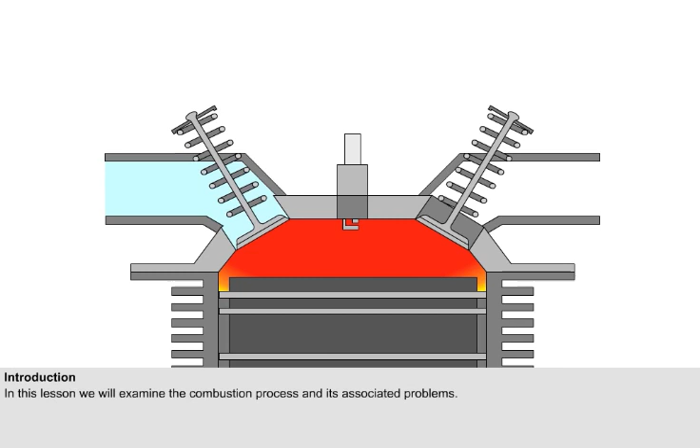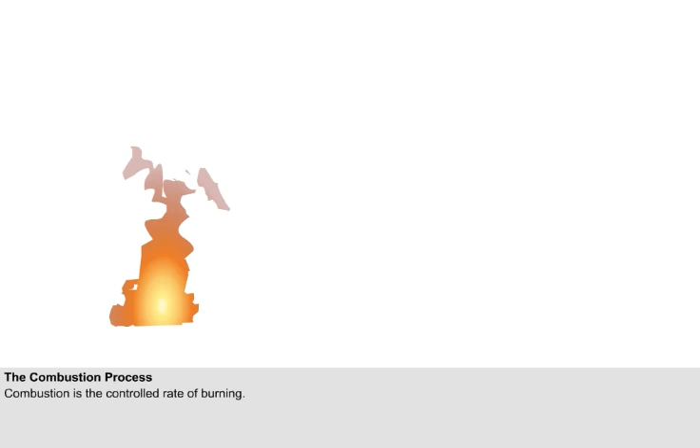Combustion of the air and gasoline mixture in a piston engine is the controlled rate of burning. It is not an explosion.

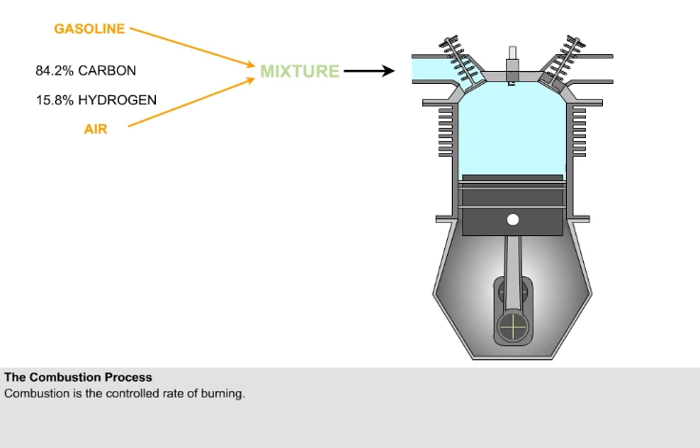The mixture induced into the cylinders consists of gasoline vapour, 84.2% carbon and 15.8% hydrogen by weight, and air, 78% nitrogen, 21% oxygen and 1% other inert gases.

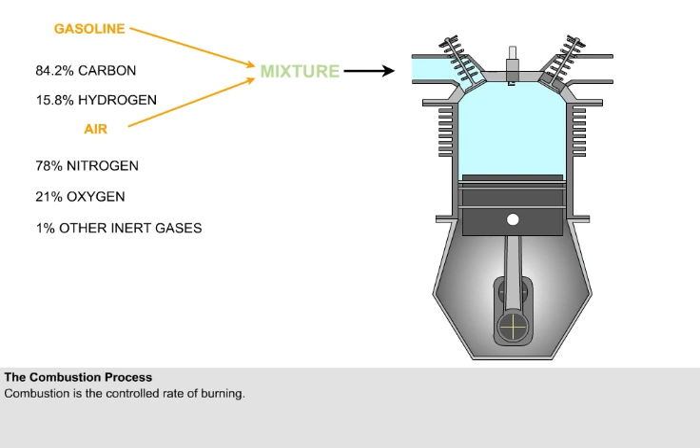When combustion has been completed, the hydrogen in the fuel will have combined with the oxygen in the air to produce H2O in the form of water vapour. And the carbon in the fuel will combine with the oxygen in the air to form carbon dioxide, or CO2.

The nitrogen and other gases play no active part in the combustion process, but they do form the bulk of the gas that is heated and expanded to create pressure energy. The nitrogen also slows down the rate of combustion. Without nitrogen, combustion would be an explosion with far too rapid a temperature and pressure rise to allow it to be harnessed to do useful work.

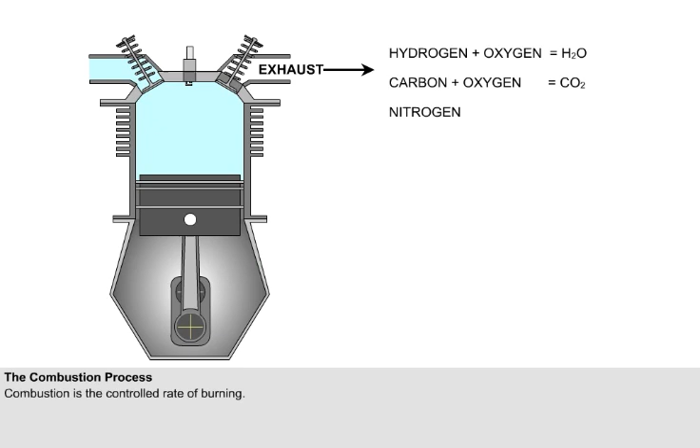When normal combustion takes place, the compressed mixture in the cylinder is ignited by the spark and burns steadily with a flame front velocity or flame rate of 60 to 80 feet per second, giving a steady and smooth temperature and pressure rise in the combustion chamber.

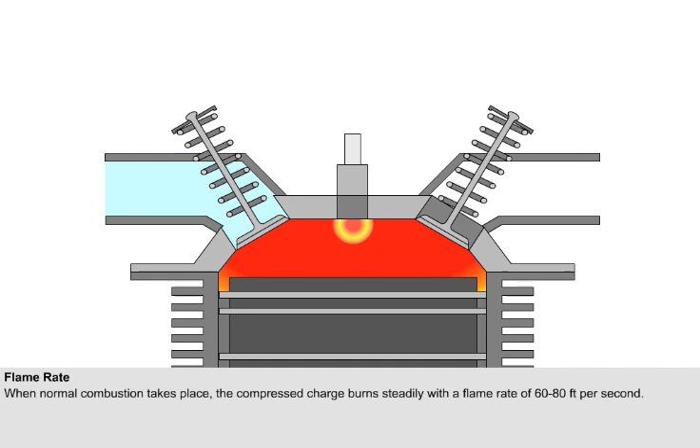Maximum pressure will be generated when combustion has been completed, and ideally this should occur when the crank is at 8 to 10 degrees after top dead centre, TDC, where, because of the ineffective crank angle, the volume of the combustion chamber is still at a minimum.

Should maximum pressure conditions arise in advance of this, that is at or before the crankshaft reaches top dead centre, the engine would tend to run backwards.

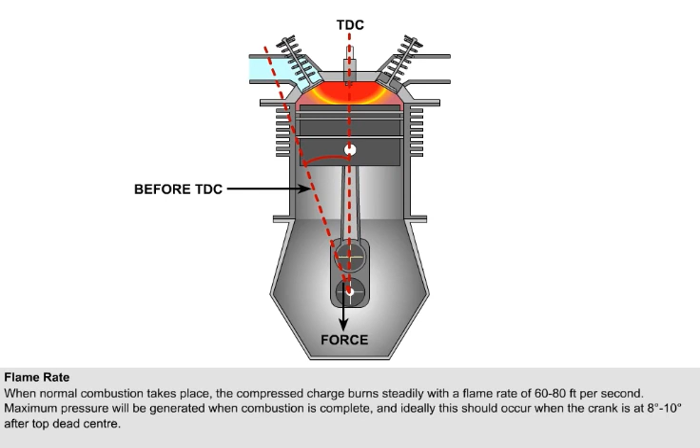As combustion takes a period of time, albeit a short one, in order for combustion to be completed when the piston is 8 to 10 degrees after top dead centre, the spark must occur before the piston reaches top dead centre.

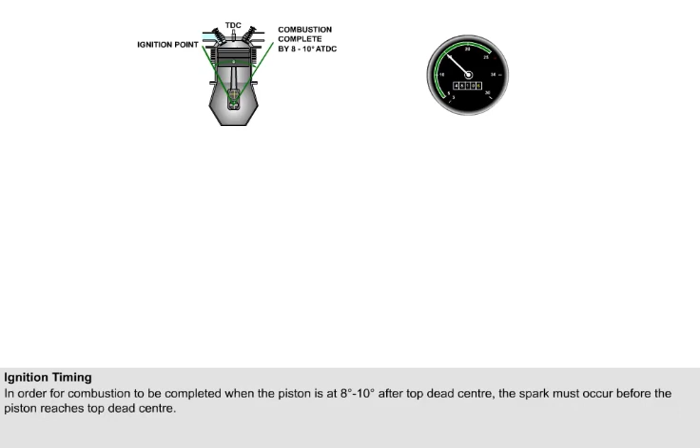The flame rate remains reasonably constant, so if the ignition point remains the same, the point in the cycle where combustion is completed will vary with variations in engine speed.

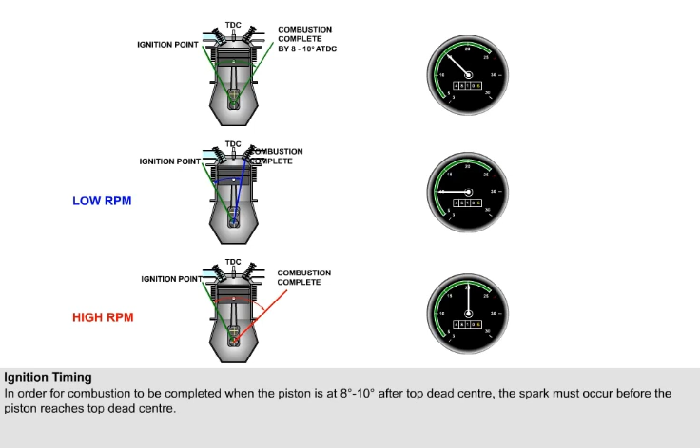At low engine speeds, it is necessary to initiate ignition later in the cycle to prevent the maximum pressure building up before the piston reaches top dead centre. The term used for this is retarding the ignition timing.

As the engine speed increases, it is necessary to initiate ignition earlier in the cycle so that the maximum pressure still occurs at 8 to 10 degrees after top dead centre. This is known as advancing the ignition timing.

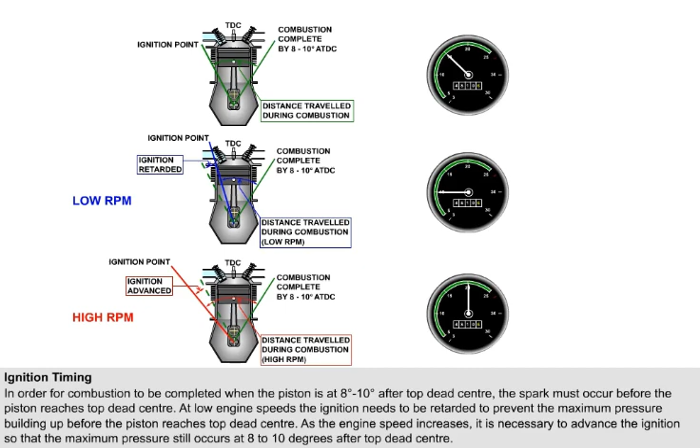The flame rate can vary slightly. The mixture will burn faster if it's made richer, that is to say, the proportion of fuel in the mixture is increased. This is because the proportion of nitrogen will be reduced.

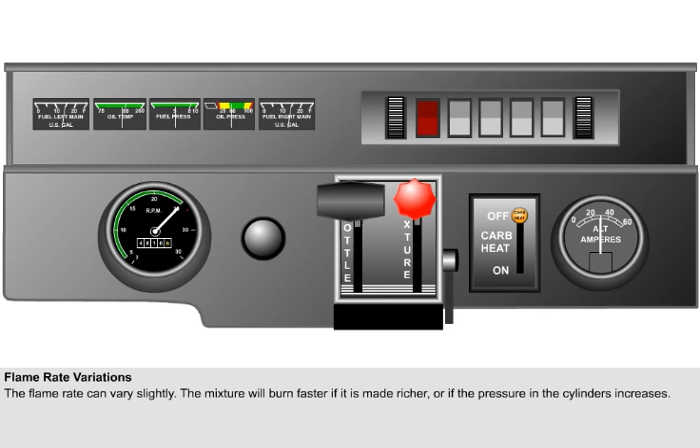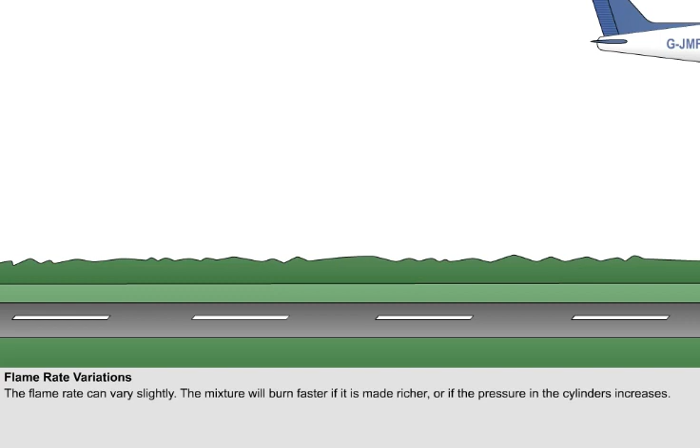The mixture will also burn faster if the pressure in the cylinders increases. An instance of both these events occurs on takeoff, when it's necessary to richen the mixture strength in order to ensure stable combustion because the engine is producing high power. This at least partly offsets the requirement to advance the ignition timing at high engine speed.

Because single-engine light aircraft have a greater need for reliability than for efficiency, the ignition timing is usually fixed at an intermediate position and not adjusted.

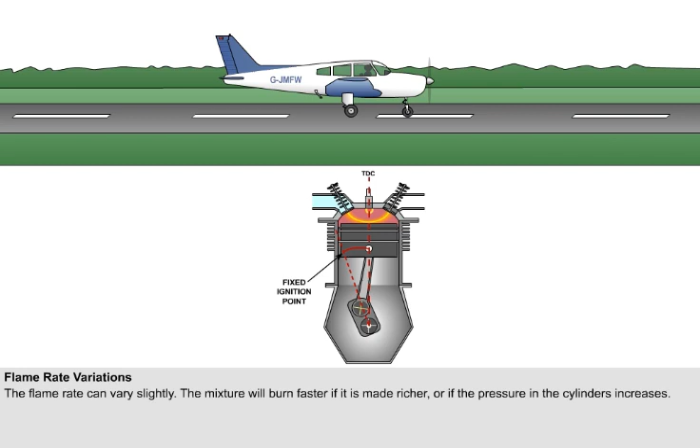As we have said, during normal combustion, the flame travels smoothly and steadily through the mixture as the advancing flame front heats the gases immediately ahead of it, so that they in turn burn.

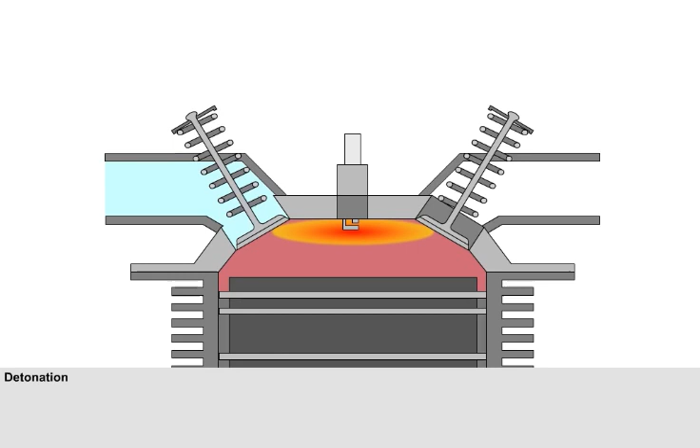Detonation, if it occurs, happens after ignition and is unstable combustion.

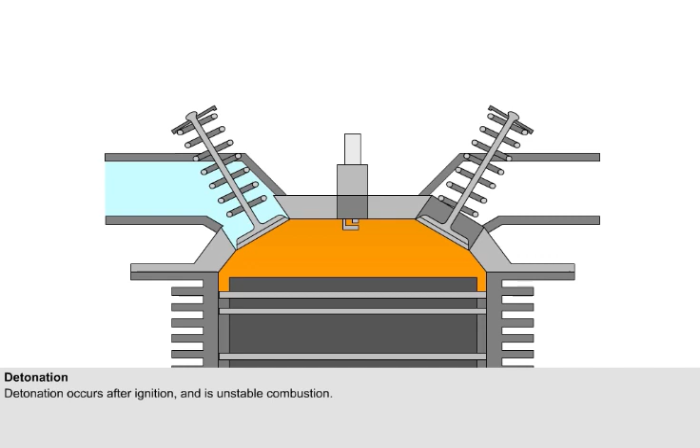Detonation happens because progressively more and more heat is concentrated in the flame front, which is brought to bear on the remaining unburnt portion of the mixture, termed end gas, and its temperature is raised.

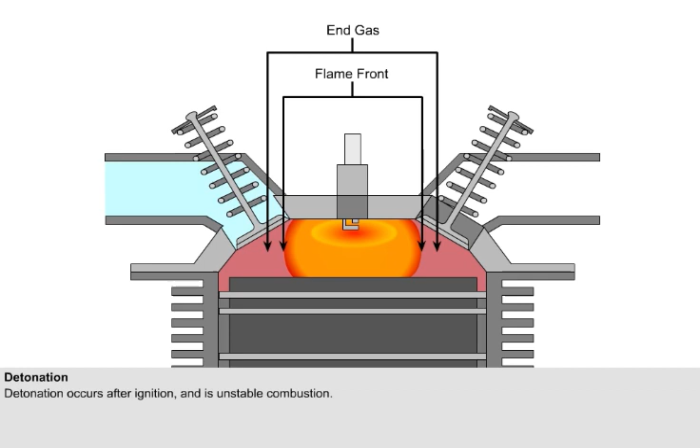In addition, the burnt gases have expanded, so the end gas is subjected to an increasing pressure and therefore its temperature increases further.

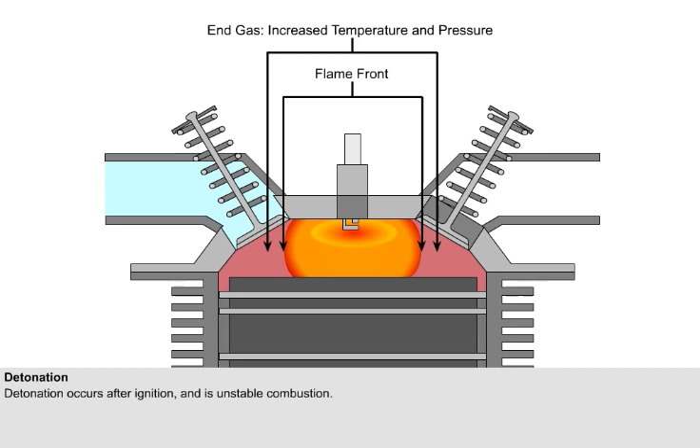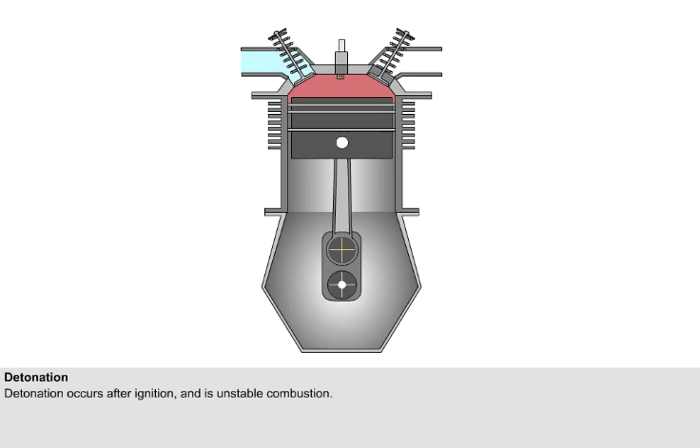If there is sufficient pressure and heat available to bring all the end gas to the point of combustion at the same instant, it will explode or detonate. The flame rate will increase to 1,000 feet per second, with a degree of violence which will depend on the amount of end gas that remains.

Overheating of the combustion chamber can also occur. This may cause the valves to split and distort. It might also damage the spark plug electrodes. The damage shown here is consistent with being caused by detonation.

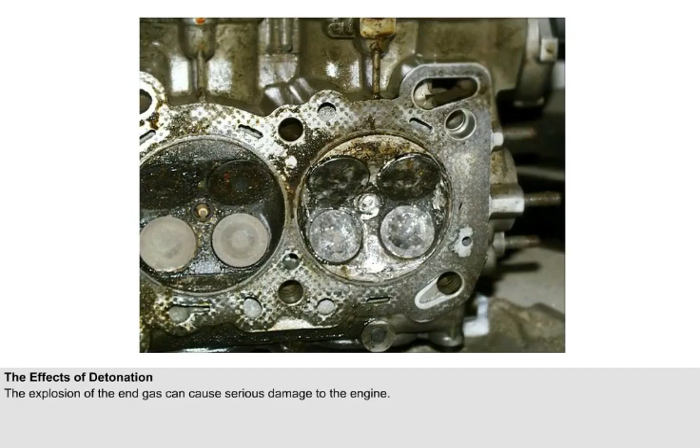There is also a sudden rise in pressure as detonation occurs, which applies a shock loading to the engine component parts, which may cause mechanical damage, particularly to the big end bearings, and even the connecting rod, although the case shown here is extreme.

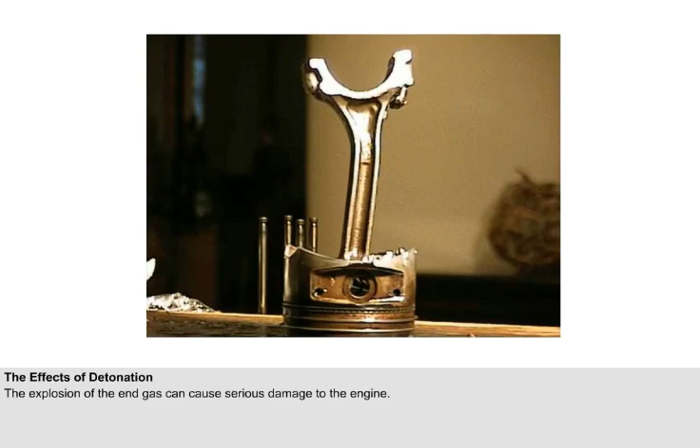Finally, because the maximum pressure is generated before the piston is in the correct position to utilize it, the piston has to overcome a high back pressure and power is lost.

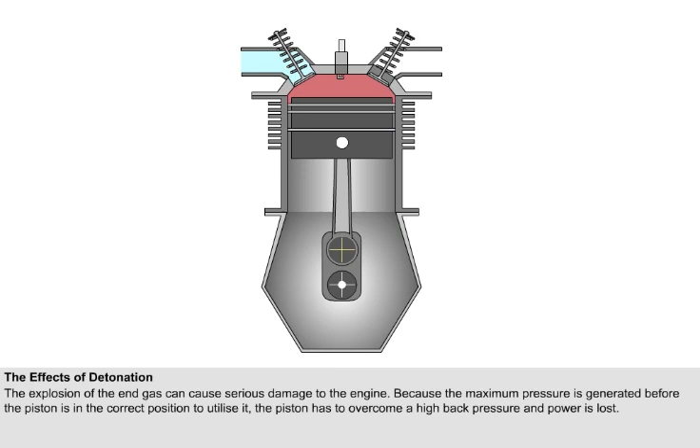There are a number of reasons why the temperature in the combustion chamber can become excessive, causing detonation to occur. Any of the following, either individually or in combination, can give rise to the onset of detonation.

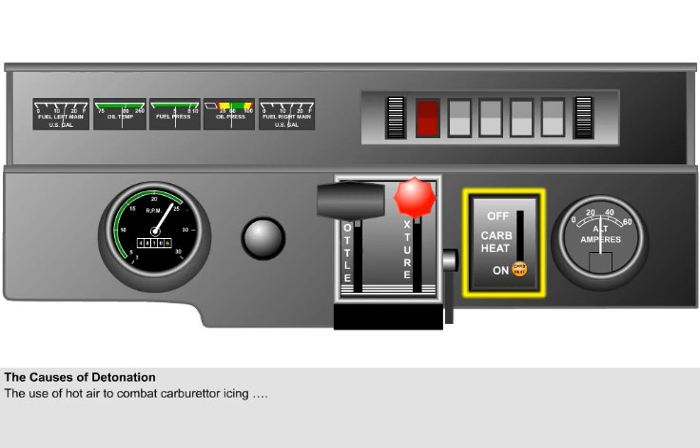Any condition that heats the charge before combustion will increase the temperature of the end gas. Preheating the air before it enters the engine by the use of carburetor heat to overcome carburetor icing, for instance, or overcompression in the supercharger or turbocharger may well give rise to excessive charge temperatures.

The weaker the mixture selected, the hotter will be the temperature of combustion. Conversely, if the mixture is made richer, it will burn cooler and more quickly, thus combating detonation.

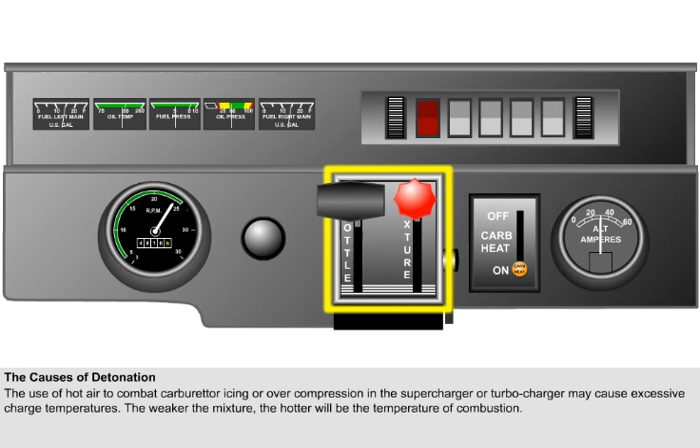The formation of carbon, or coke as it is sometimes known, in the cylinder head will prevent heat dissipation, possibly bringing the temperature of combustion up to the point of detonation.

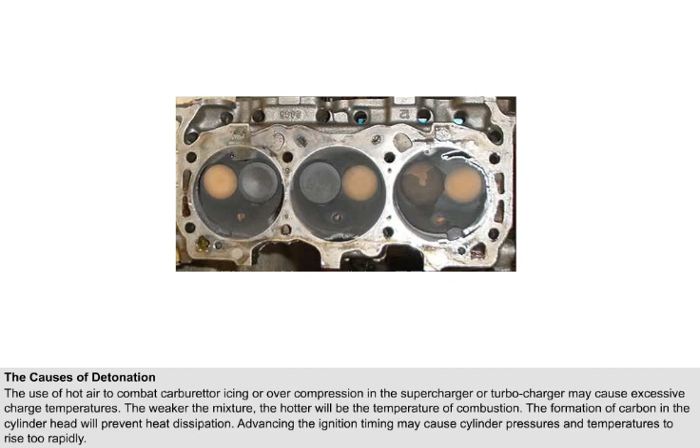Advancing the ignition timing, in other words igniting the mixture too early, may cause cylinder pressures and temperatures to rise too rapidly, possibly causing detonation to occur.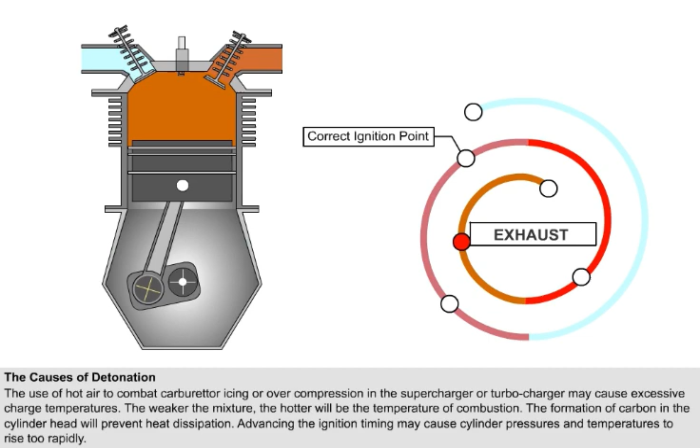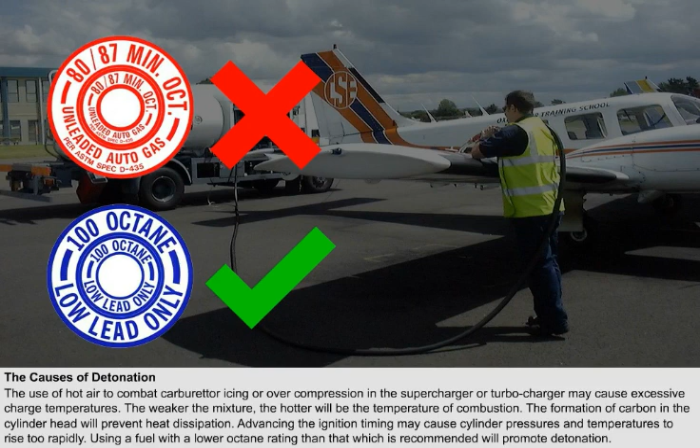If a fuel with an octane rating lower than that which is recommended is used, it will promote detonation, especially under high power conditions. It's important, therefore, that fuel of the recommended octane rating is used. If this fuel is not available, then one with a higher octane rating may be used.

The fact that detonation is occurring can be recognized by a metallic knocking sound, sometimes called pinging, which is caused by the violent vibrating pressure waves striking the walls of the combustion chamber.

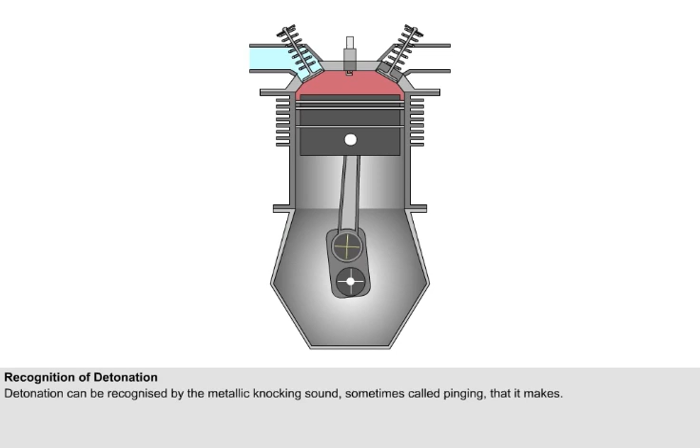A great deal of damage may be done under high power conditions, particularly in an aircraft where, because of the noise created by the propeller, the detonation may go unnoticed until it is too late.

Engine designers can help to prevent detonation by ensuring that the flame is started from the vicinity of some hot spots such as the exhaust valve, so that the end gas is pushed away from the hotter parts of the combustion chamber and compressed into a cooler part.

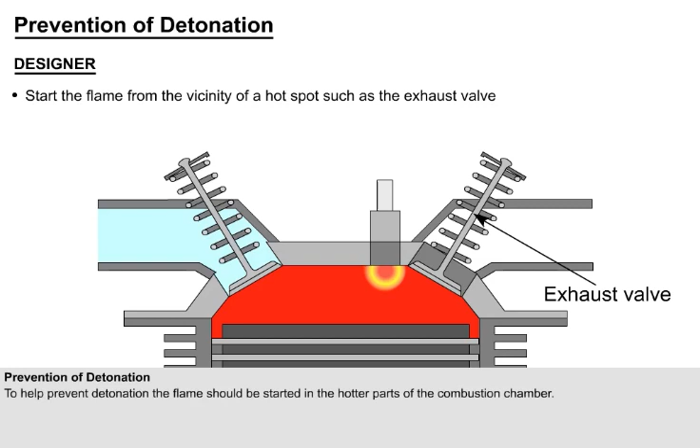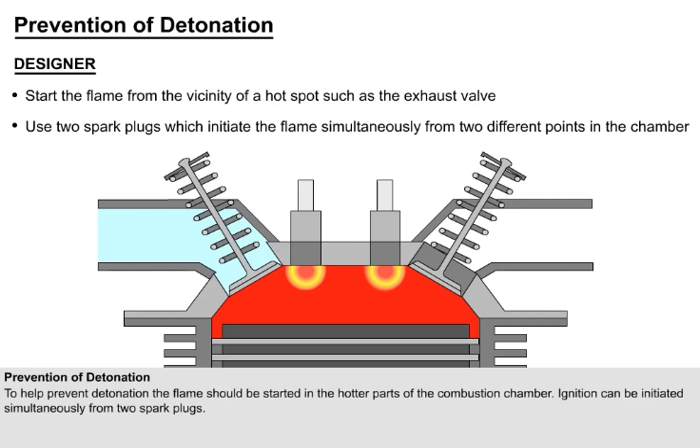In order to reduce the time taken for the flame front to travel across the combustion chamber and therefore the risk of detonation, some engines are designed with two spark plugs which initiate the flame simultaneously from two different points in the chamber.

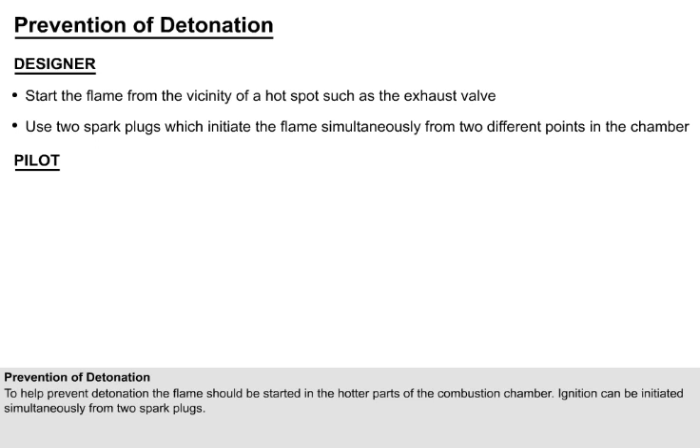The pilot can also take a number of actions to help prevent detonation. On aircraft with variable pitch propellers, the same power may be obtained at a higher engine speed by using a finer propeller pitch. This enables a smaller throttle opening to be used, which helps in two ways.

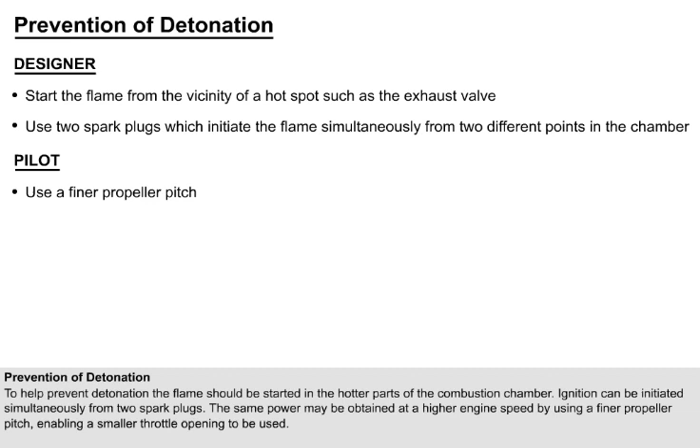The smaller throttle opening reduces the cylinder pressure, and the higher running speed cuts down the time available for detonation to develop.

Carburetor heat should not be used at very high engine power settings, such as during takeoff. A rich mixture should be used at high power settings.

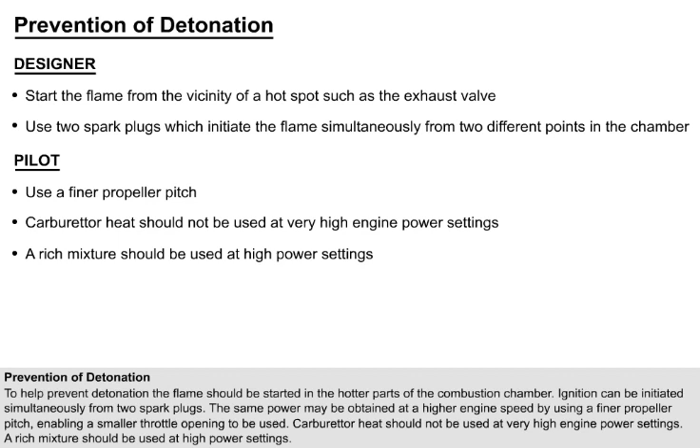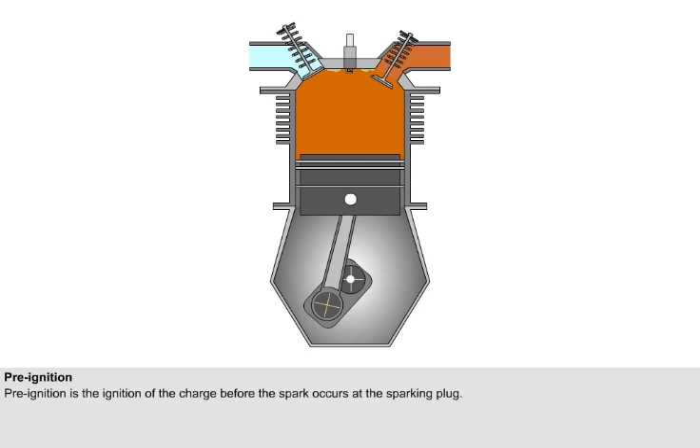Pre-ignition is the ignition of the charge before the spark occurs at the sparking plug. This is usually caused by a local hotspot in the combustion chamber, such as incandescent carbon or very hot sparking plug points.

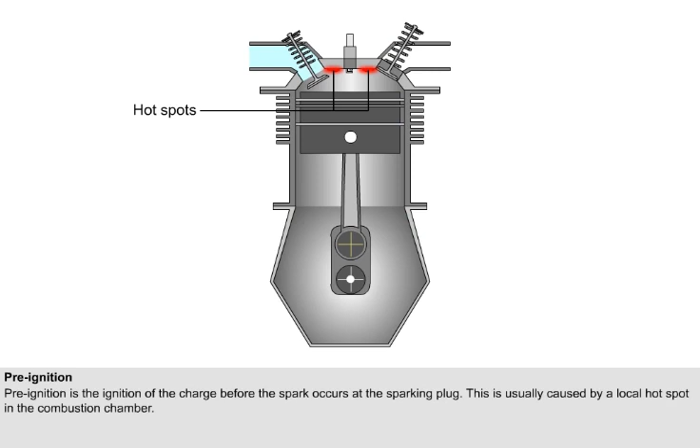Pre-ignition can cause the engine to run very erratically.

If, as in a car, the ignition switch is used to shut down the engine, it may continue turning over if it is still supplied with fuel. This is called running on.

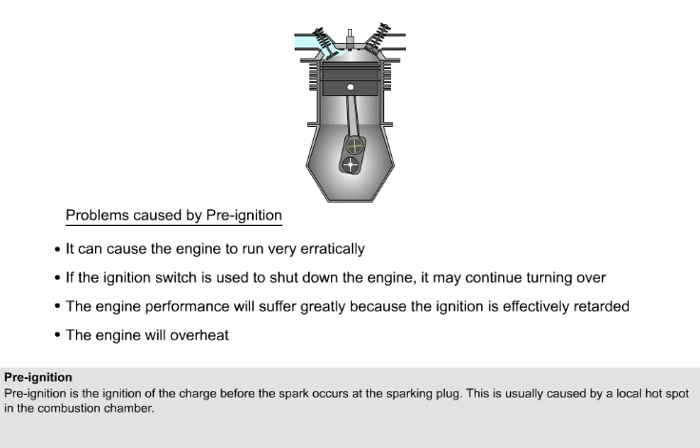The engine performance will suffer greatly because the ignition is effectively retarded. This in turn will cause the engine to overheat, which exacerbates the situation.